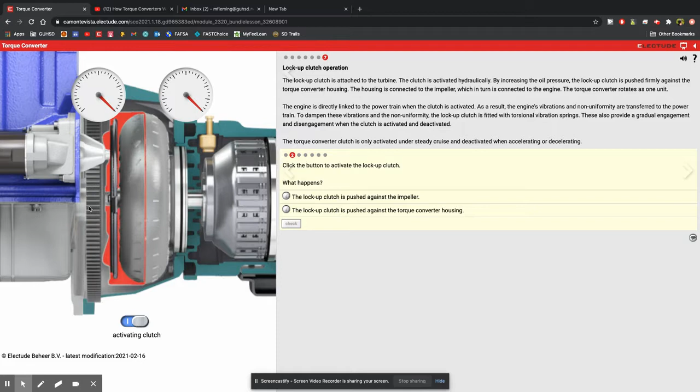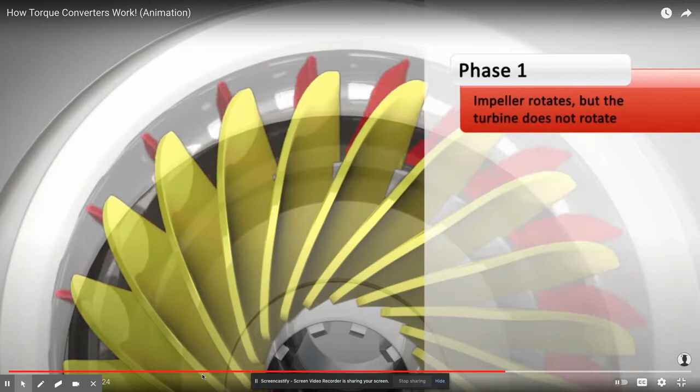Torque converters have three stages of operation. The first phase is called stall. Here, the engine applies power to the impeller, but the turbine does not rotate because the driver keeps his or her foot on the brake at traffic lights, so the vehicle does not move.

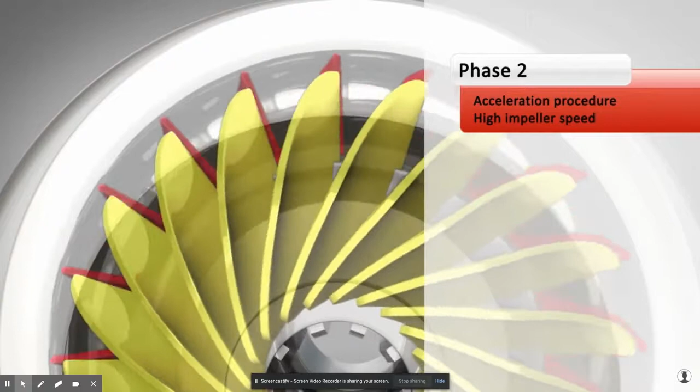The second phase is called acceleration and takes place when the traffic lights turn green. The brakes are not applied, and the driver presses the accelerator pedal. Consequently, the impeller rotates faster, but there is a relatively large difference between impeller and turbine speed. Under this condition, the converter produces torque multiplication, which is needed for acceleration.

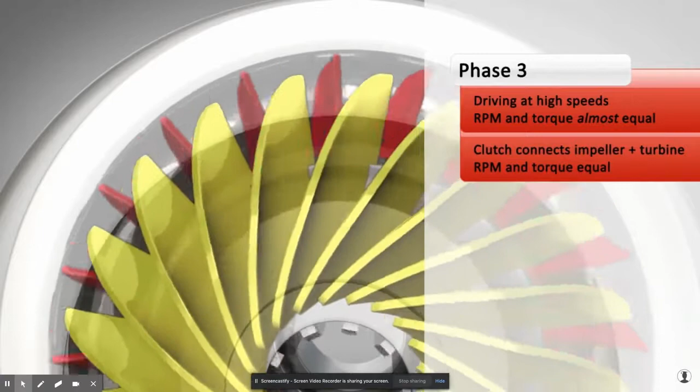The third phase is called coupling. The vehicle moves fast, the turbine has reached approximately 90% of the speed of the impeller, and the torque multiplication has ceased. Now the torque converter is a simple fluid coupling. Modern vehicles use a lockup clutch at this stage of operation to lock the turbine to the impeller, eliminating losses associated with fluid drive.

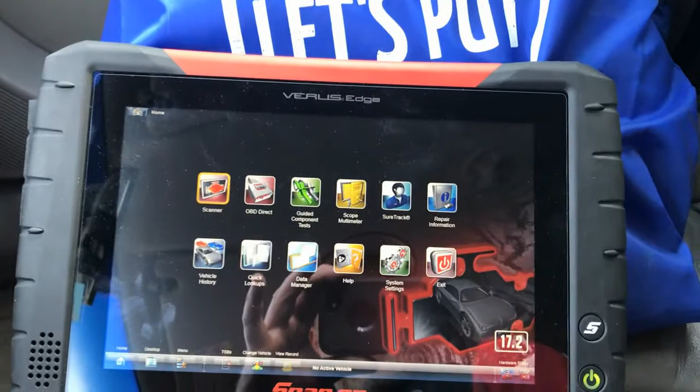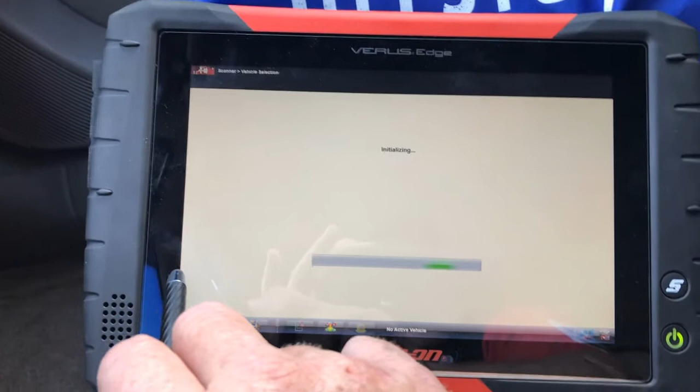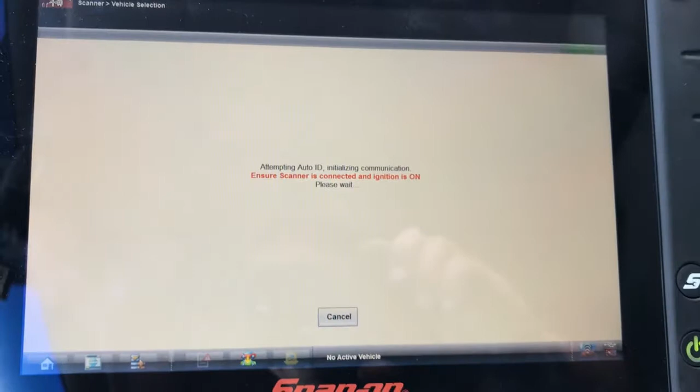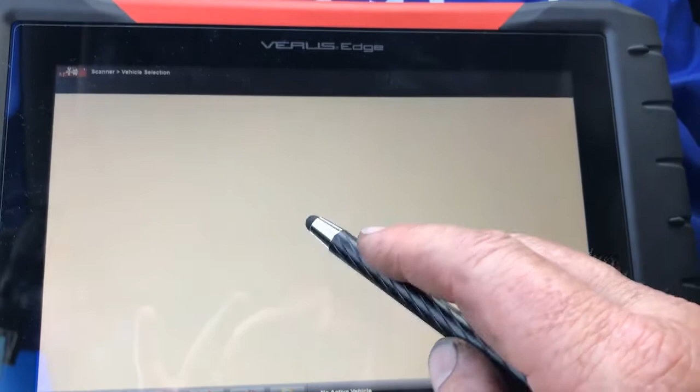Okay, to get started, we're going to go ahead and hit scanner. We're dealing with a 2001 Saturn. I'm going to pick Saturn, right here, and hopefully we can do the automatic ID. If not, then I've got to manually put in my VIN number. It did recognize it, so I'm happy. 2001 Saturn L Series 300. Hit start. Okay, so I want to go to transmission.

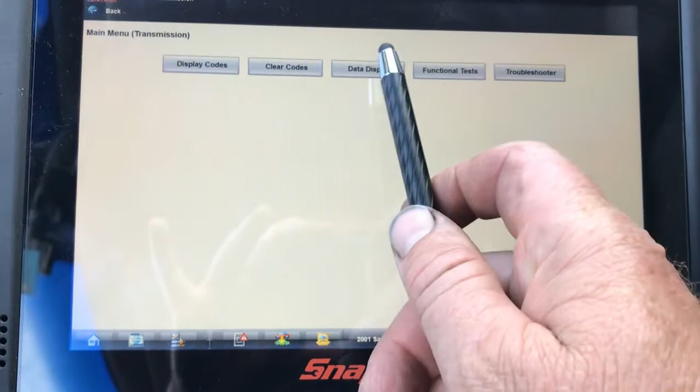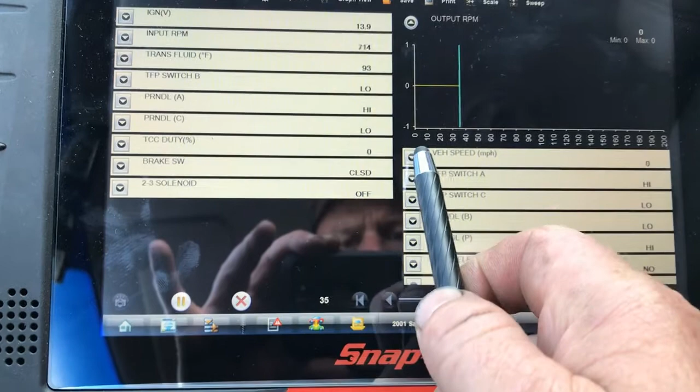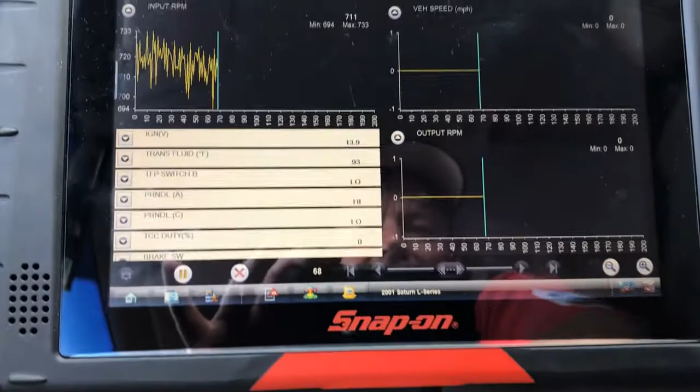If you're going to go for a test drive, do data display. I'm going to go to data display, and this is where you would pick what data you want to look at for the torque converter clutch lockup. So I want output RPM, maybe vehicle speed, input RPM, and where is torque converter clutch duty cycle? That tells me the amount of lockup we have.

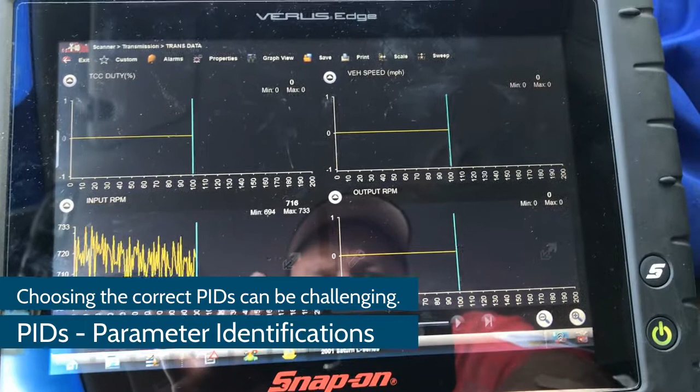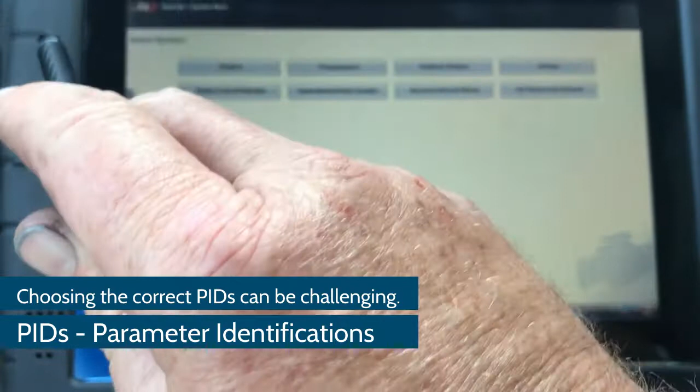Now, I don't know if I like everything here, so I'm going to back up because I would like to know my RPM. So let's go back and try engine and data display. And I want to do inputs, not output data.

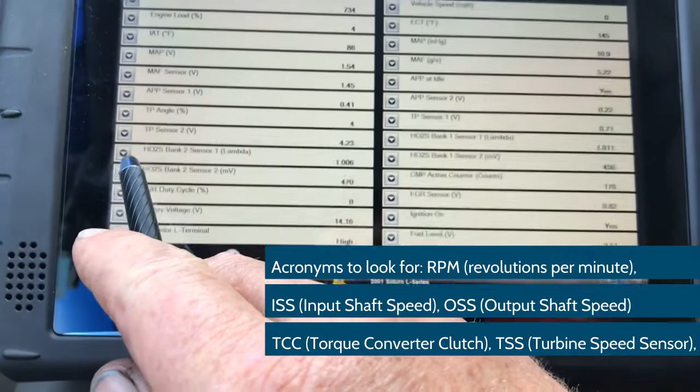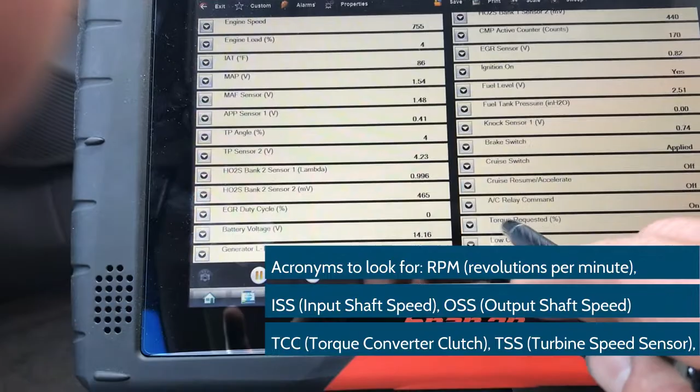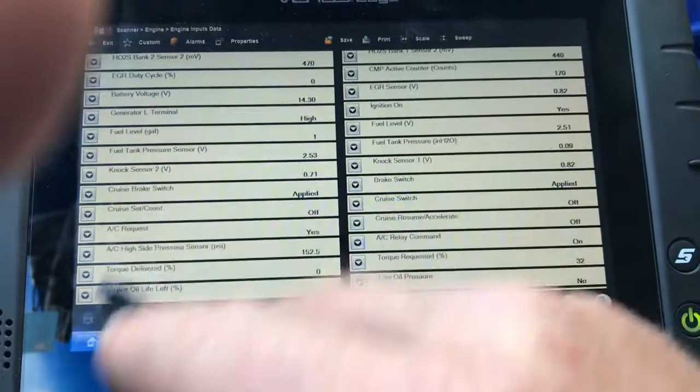And let's see, I want my engine speed, and I'm looking for torque converter clutch. Vehicle speed, yes, I would take that. O2 sensor, fuel, torque requested. That, I'm not really sure what that is. Torque delivered - I think that's just referring to the amount of torque an engine is creating.

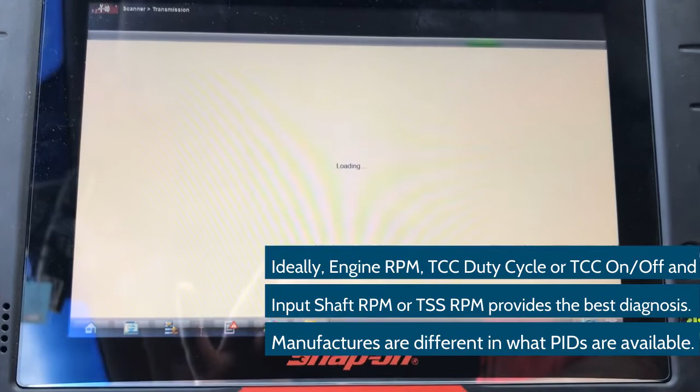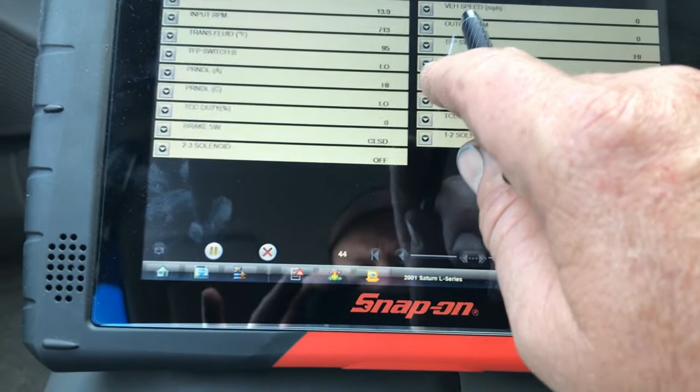So we got to go back to transmission. Alright, let's go to transmission and data display. And torque converter clutch release pressure, that might be interesting. This is transmission fluid pressure switch A, pressure switch B. Vehicle speed and output RPM is not bad.

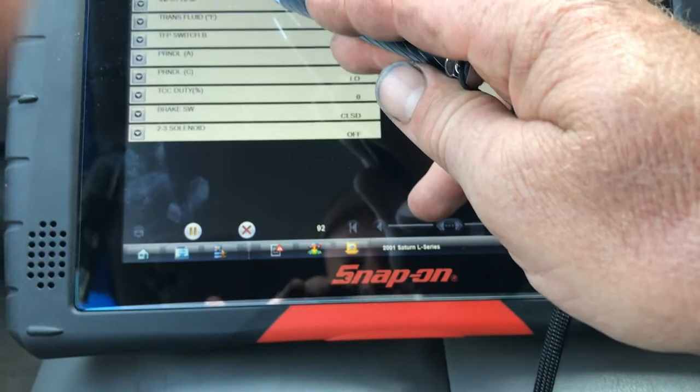Duty cycle, definitely. So I want to go for a test drive with this and with input RPM, which is my turbine speed. Unfortunately, I do not get the RPM, which is a real problem.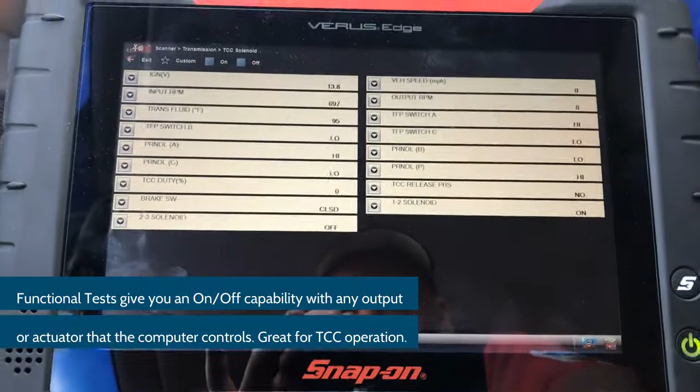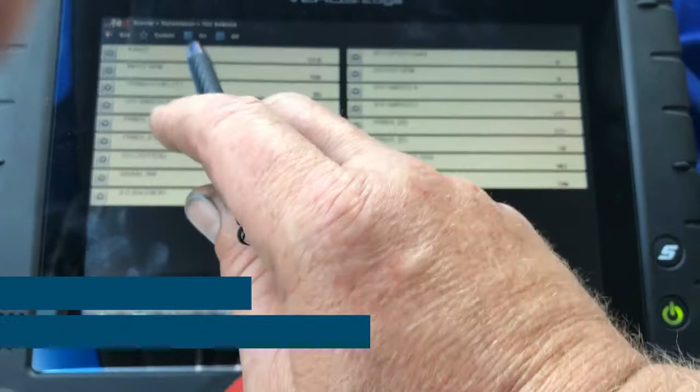The other choice we have is going back to functional tests. Functional tests are output state controls, and allows you to turn something on - torque converter clutch solenoid. And this will probably give me the PIDs that I want to match up turbine speed to RPM speed of the engine. So I can command it on, I can command it off. I could go ahead and look at my torque converter clutch duty cycle, and it's giving me my input RPM.

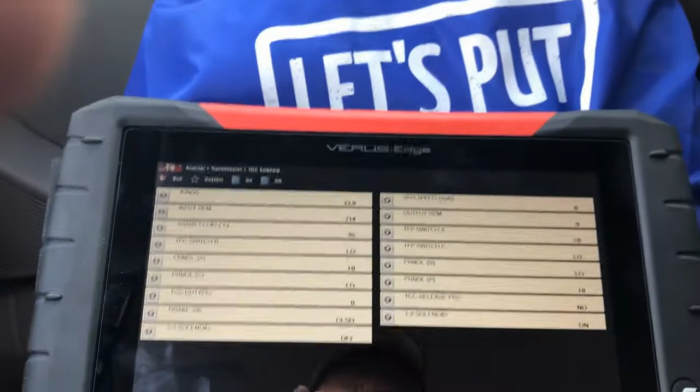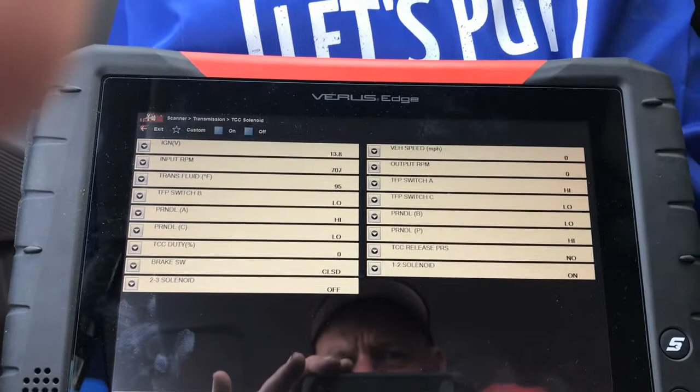I'm not quite happy that doesn't give me my engine RPM, but it's what we are given. You could use this screen to put a car on a lift and turn this on, but it's probably going to tell you to turn it on when the vehicle is at 40 miles an hour or above. Okay? All right, we're going to go for a test drive.

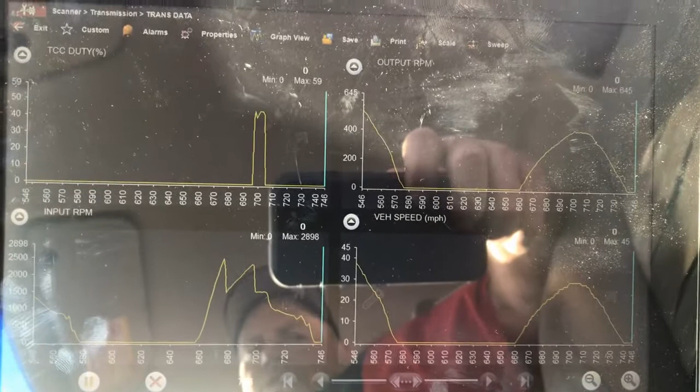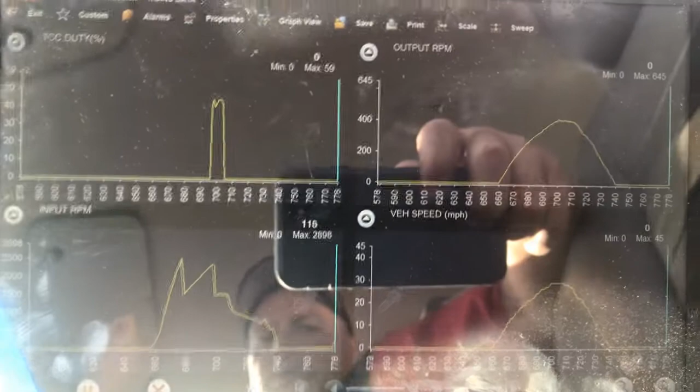Okay, we're driving the car right now. I can't control the glare - I tried multiple ways, you can see I just went from one light to another light. In the upper left-hand corner, my torque converter clutch locked up to almost 40%. This is a duty cycle clutch, torque converter clutch, so it modulates how much it is applied. It's not always 100%. So I'm at a stop sign right now.

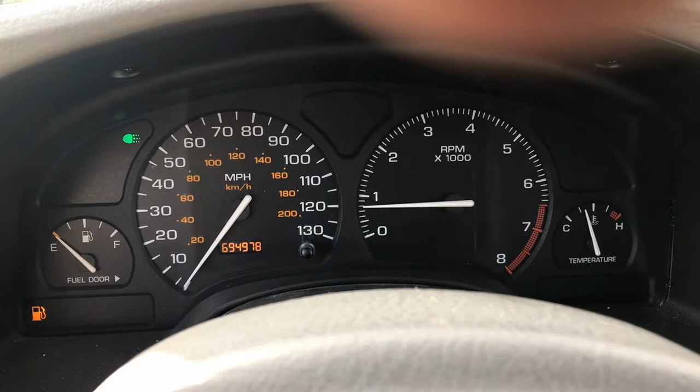Here's my RPM gauge, because the scanner won't give me that. So when I see the torque converter clutch applied, I'm going to look at my RPM gauge, and then I'm going to compare it to my readings here on the scanner.

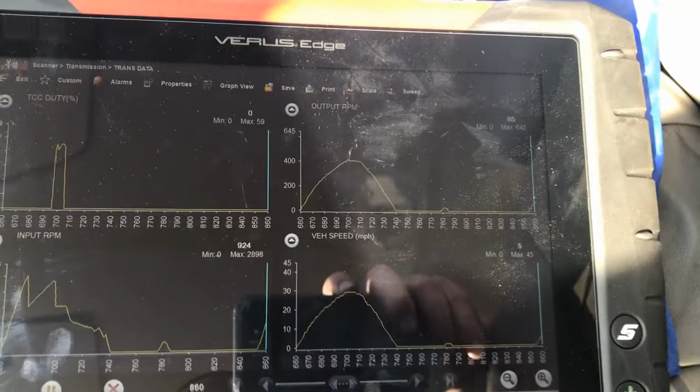Here we go, so I'm accelerating right now. You can watch my speed in the lower right hand corner. Alright, 25 miles an hour, 30 miles an hour. There we go, right on 40 miles an hour, just like I said. I'm at 2,400 RPM, 2,600 RPM.

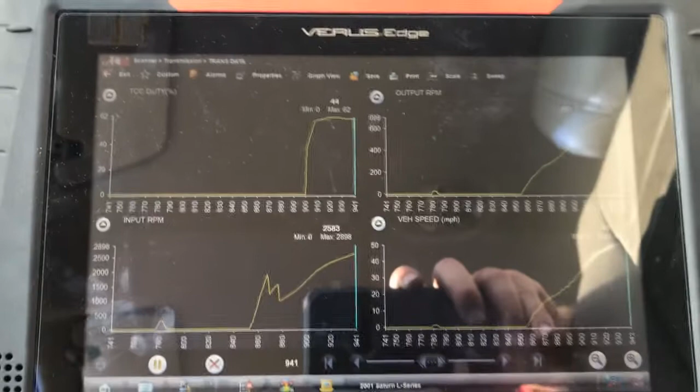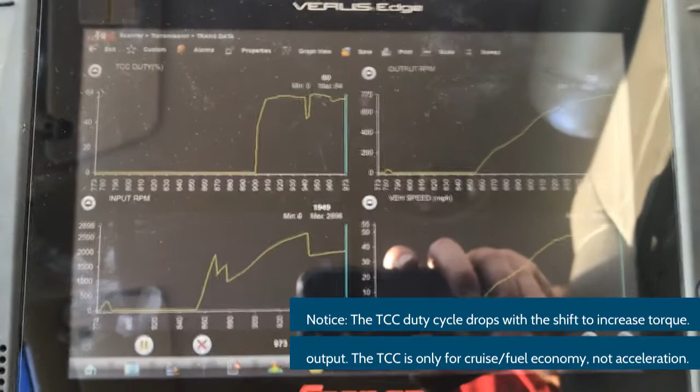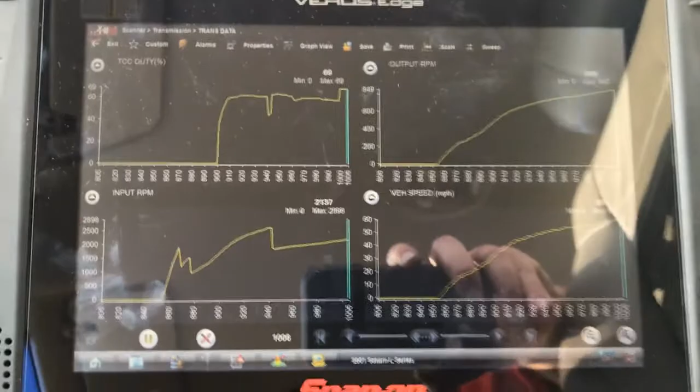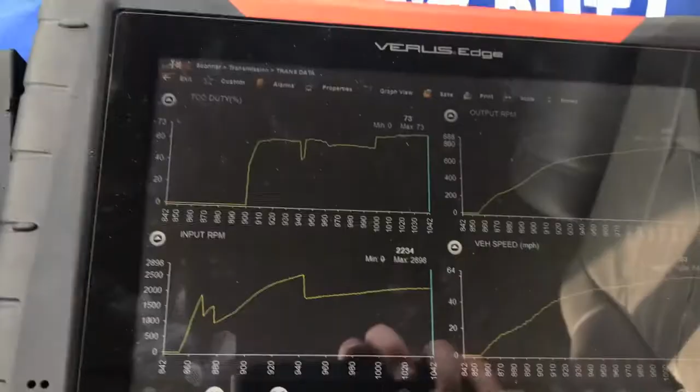And I just felt it shift right there to the final fourth gear overdrive. And it looks like we're at complete lockup, or like my input shaft speed is matching my RPM right here. So right now I'm at 2200, and I look over here and it looks like I'm at about 2200 too.

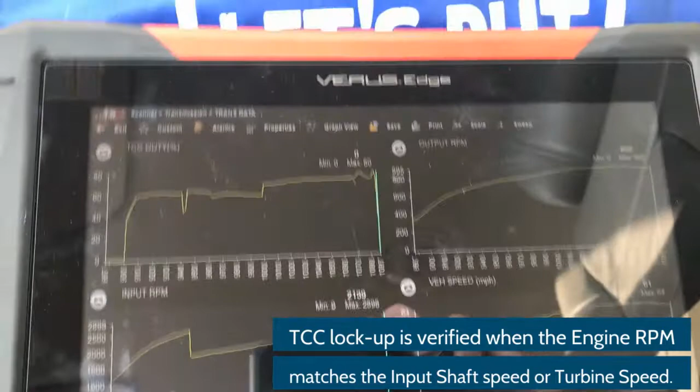But you can see why - I really don't like that I don't have the option of comparing my RPM of my motor to the RPM of my turbine speed, because the input shaft RPM is your turbine speed. Okay? Alright, so that's pretty much it. And I actually had to run over a block of wood just to make this video.

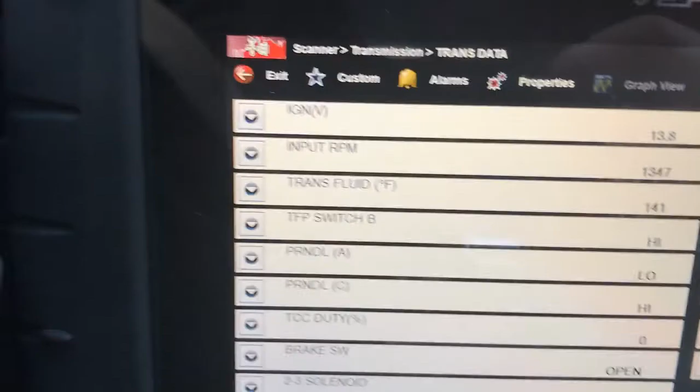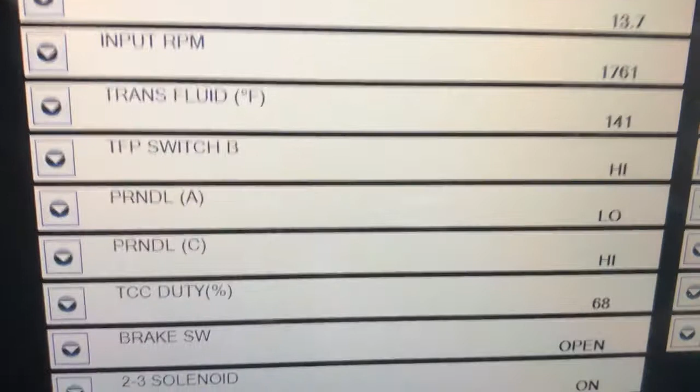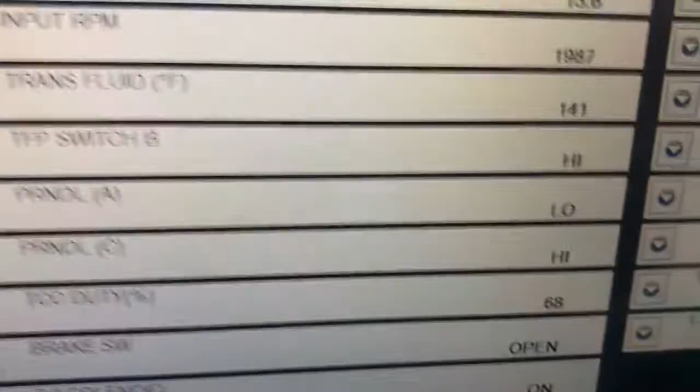Now it should come on, so I'm doing about 35 miles an hour and I'm going up a slight incline. As soon as I get up to about 40 miles an hour, that duty cycle should kick in, and there it does. Okay, perfect. I'm at quarter throttle, 35 miles an hour with a slight hill, and you can see that it's 68% applied. If I give it any gas, it goes to 0.

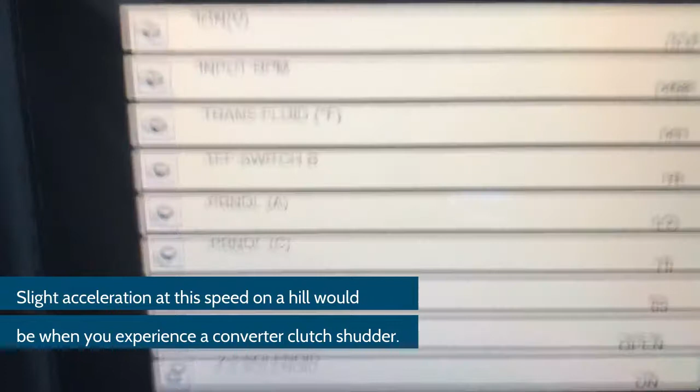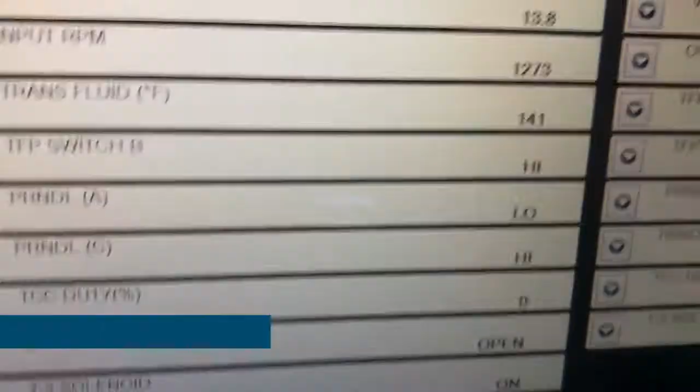Okay, and this is how you would test your torque converter clutch. You would get it so it's starting to lock up, get the motor to kind of lug on a slight incline. So I'm going on a slight incline, and then you would give it a little bit of gas slowly, watching that torque converter clutch and feeling for any kind of vibration coming from the floorboards.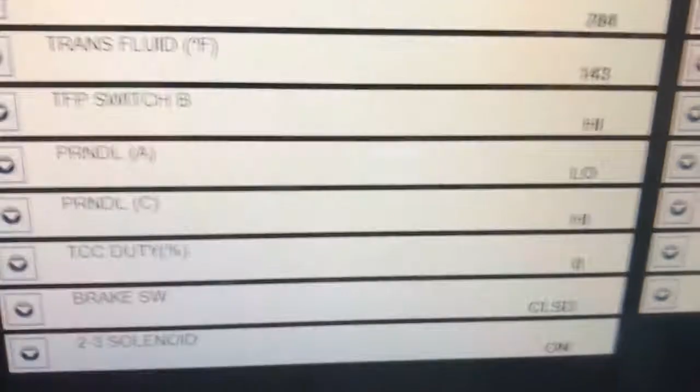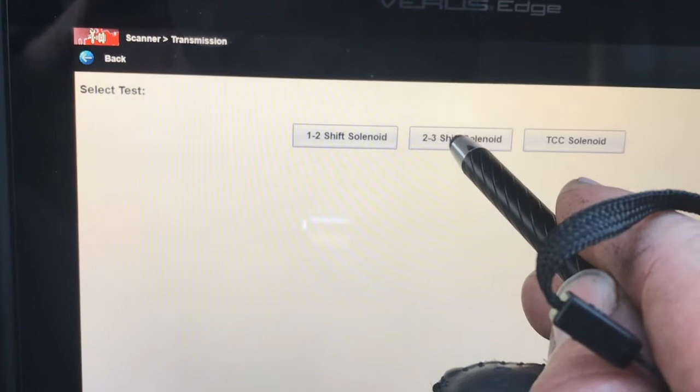What we're going to do - but I want to go over functional tests. Functional tests, you could turn on any shift solenoid by manually activating, or you could do your torque converter clutch solenoid, and it won't let me do it because we need to have it at 35 miles an hour. But this is where you could actually put the car up on the lift and activate your scanner, activate the solenoid, and watch the parameters.